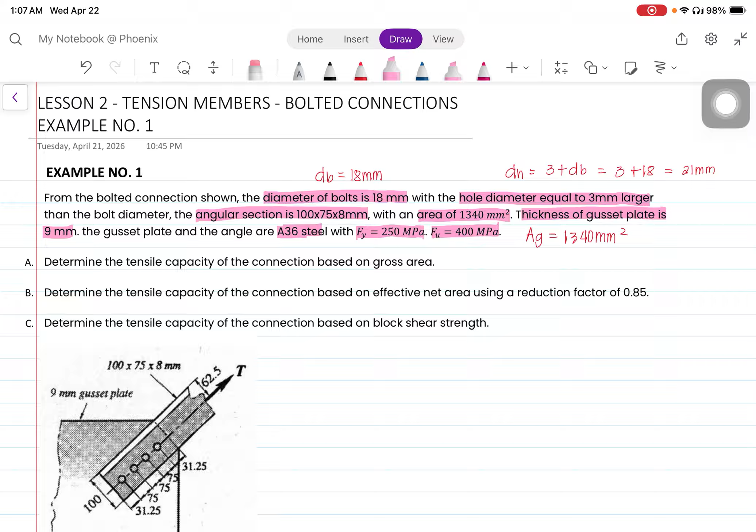So let us go one by one through what is being asked. For letter A, we are asked to determine the tensile capacity of the connection based on gross area. So we are now looking for the tensile capacity based on gross area.

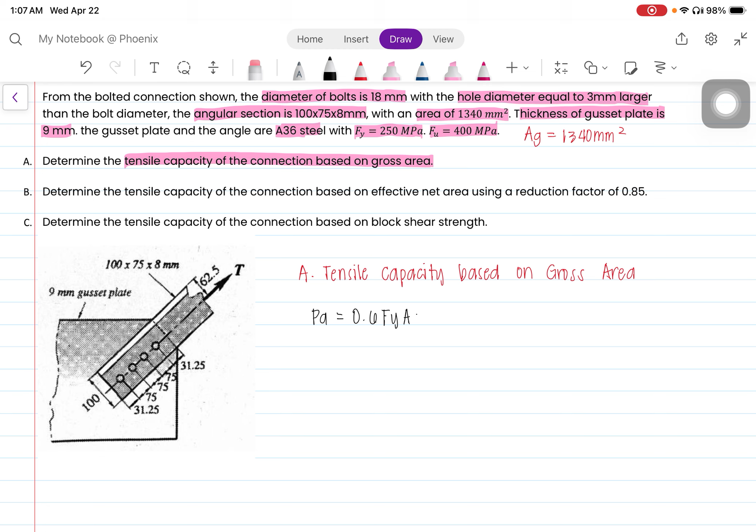So what is our formula here? The formula is PA equals 0.6 FY times AG. So do we have a value for Fy? Yes. What about the value of AG? Yes, that was also given to us.

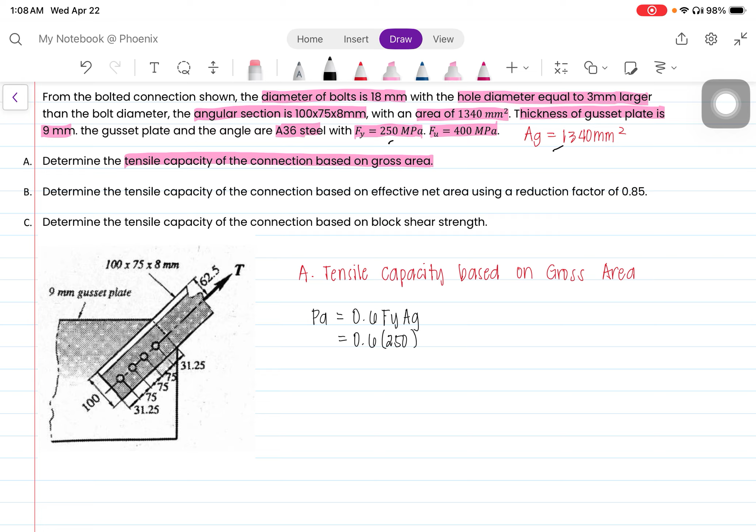So this means we can directly substitute. We have 0.6 multiplied by our Fy of 250 megapascals, multiplied by our AG of 1,340 mm squared. By calculating this, we get 201,000, and this is in Newton.

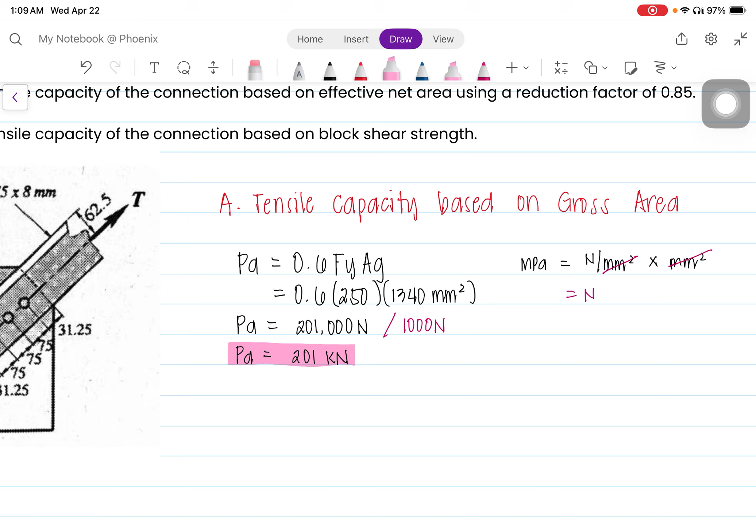But since this is too large, let's convert this into kilonewton by dividing by 1,000 Newton. Therefore, our allowable tensile strength will be equal to 201 kilonewton. And that is now our final answer for letter A.

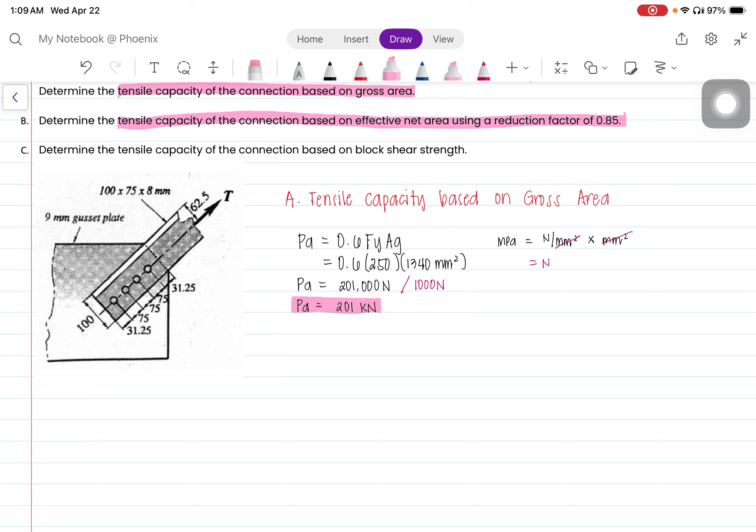Next, we are required to determine the tensile capacity of the connection based on the effective net area, using a reduction factor of 0.85.

For letter B, we are now required to get the tensile capacity based on effective net area. Take note, it says effective net area.

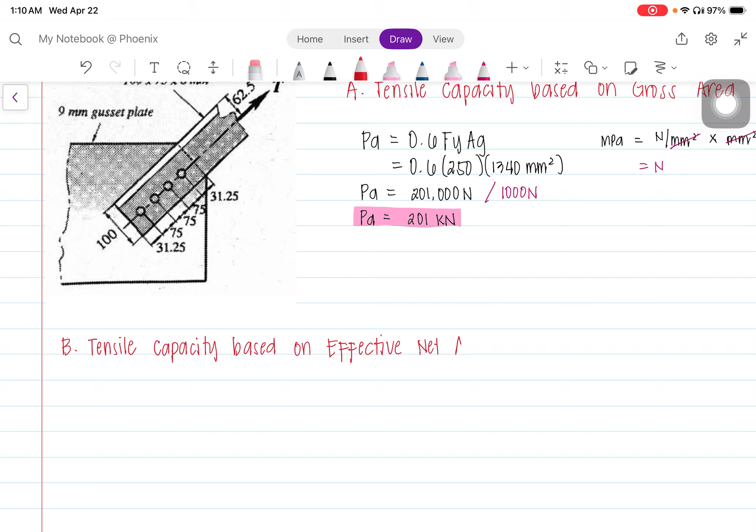So we need to get the effective net area, and we are also given our reduction factor or reduction coefficient, denoted by U, which is equal to 0.85.

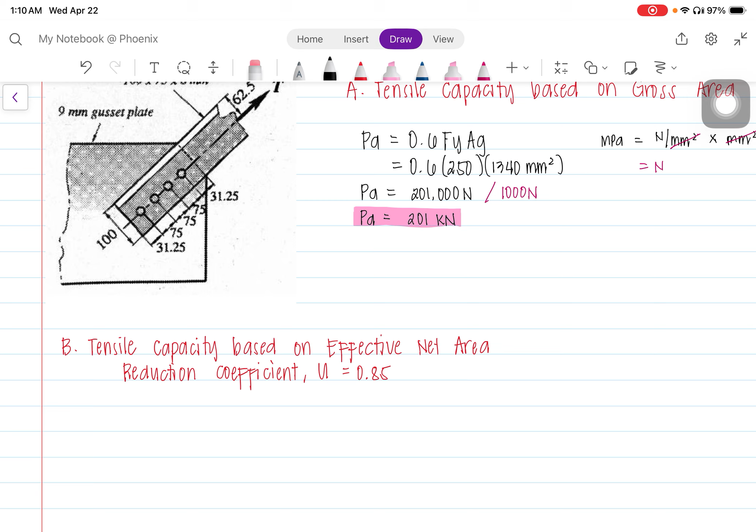So what is our formula for the tensile capacity based on effective net area? That is PA equals 0.5 FU AE. We use AE because we are talking about the effective net area, and AE equals the reduction coefficient multiplied by the net area.

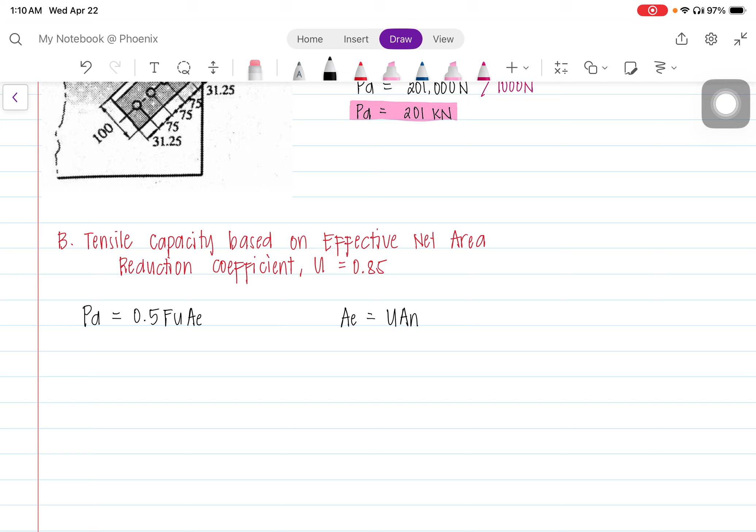So first, let us solve for AN. We need AN. So how do we solve for AN? As mentioned earlier, we just take the cross section, or take its outer edge.

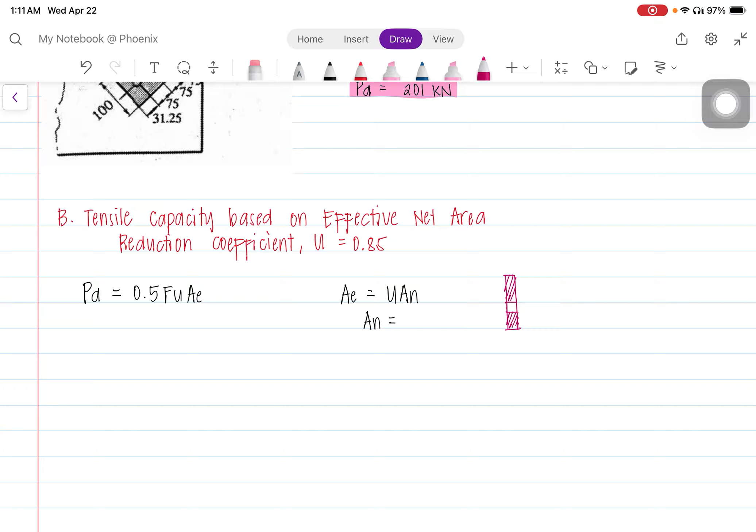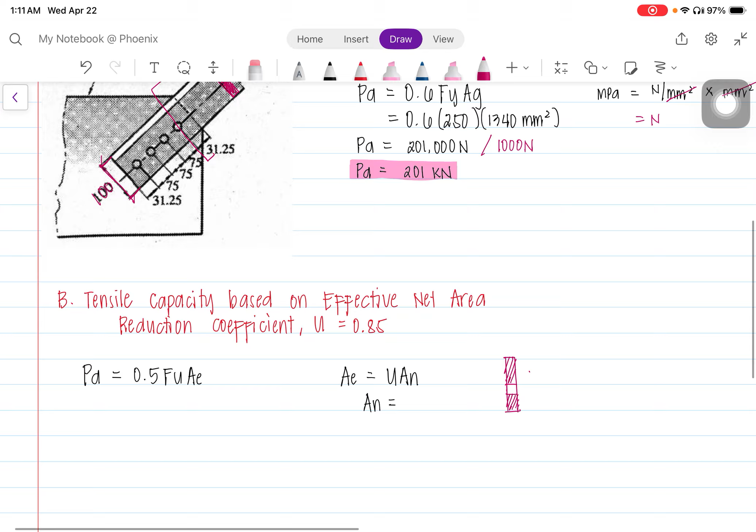As stated, the width here is 100. So that is your width. And what is the thickness? As I mentioned, this is the thickness of the angle, which is 8 mm.

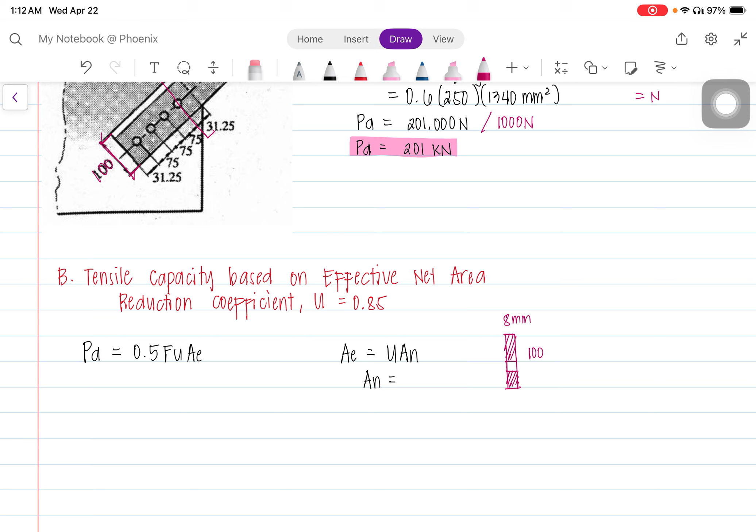So we can now solve for our AN. We say that it is the gross width minus the number of bolts times the diameter of the hole.

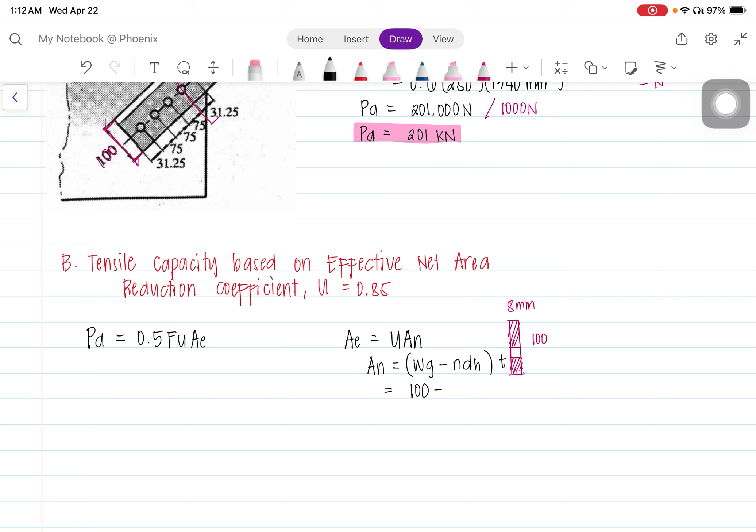And then we multiply it by the thickness. Okay, so let us solve for this one. We have now 100 minus the one that we will remove, since there's only one hole passing through here.

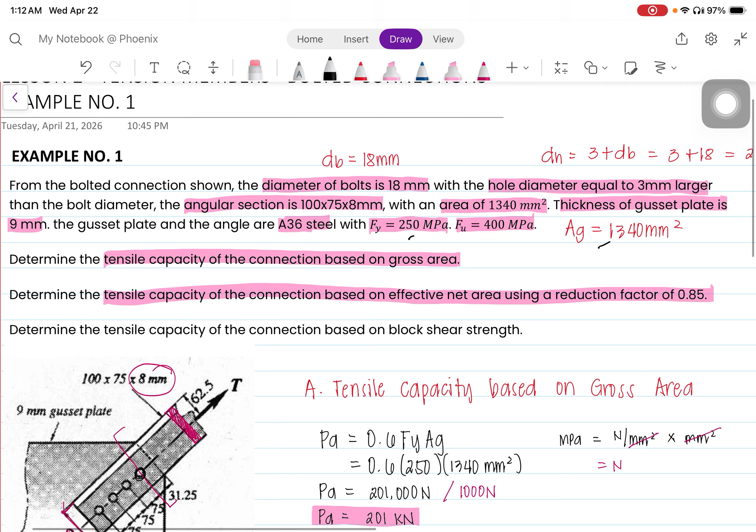So next, what is the diameter of the hole? We already wrote that the diameter of the hole is 21 millimeter. So we multiply it by 21 millimeter, and then we multiply it by the thickness of 8 mm. So we can now solve for the area net, which is 632

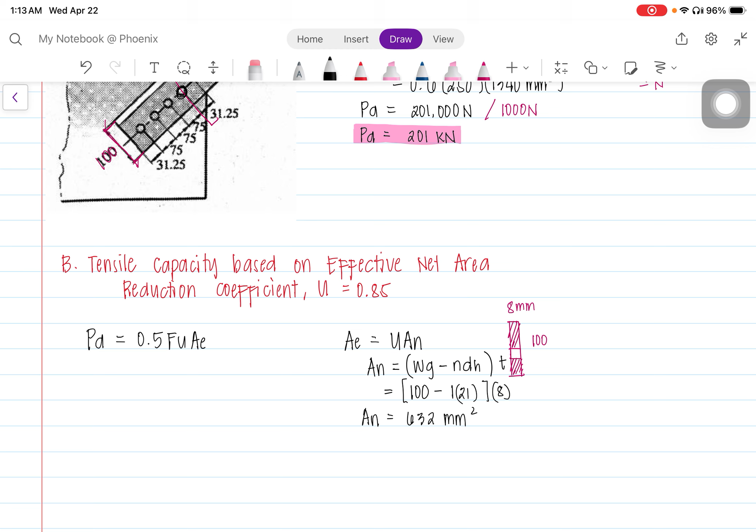mm squared. Okay, so to get now our AE, let's substitute here. So our PA now is equal to 0.5 FU, and AE we replace with AN.

Okay, let us just substitute the given values. We have 0.5 multiplied by the FU of 400 megapascals, multiplied by the U, our U is 0.85, and our AN that we got is 632.

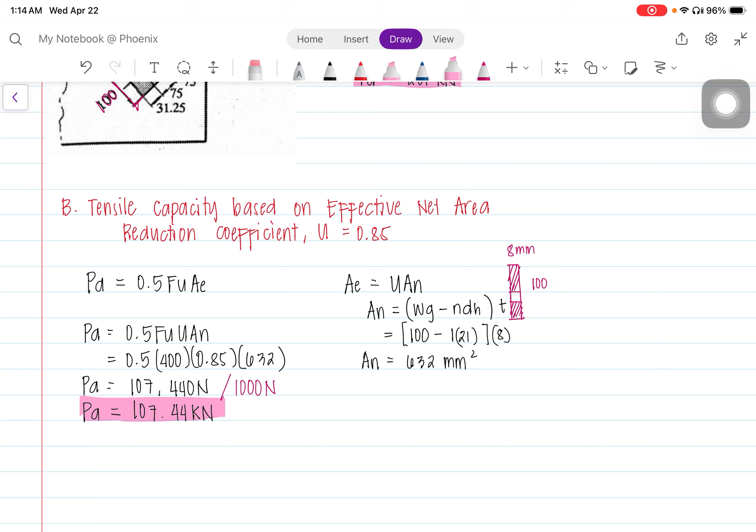Okay, and then what will be now our PA? Our PA will be 107,440 Newton. And since that's too big in Newton, let us convert this into kilonewton by dividing it by 1,000. What will we get for PA? That is 107.44 kilonewton. And that is now our final answer for letter B, the effective net area.

Okay, so next, let's get our tensile strength, tensile capacity, tensile capacity based on block shear.

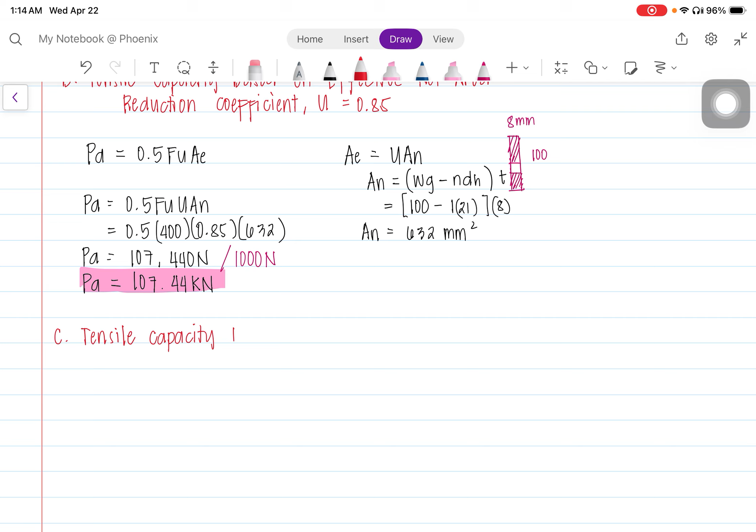Okay, so what is now our formula for block shear? This is PA is equal to 0.3 FU ANV plus 0.5 FU ANT.

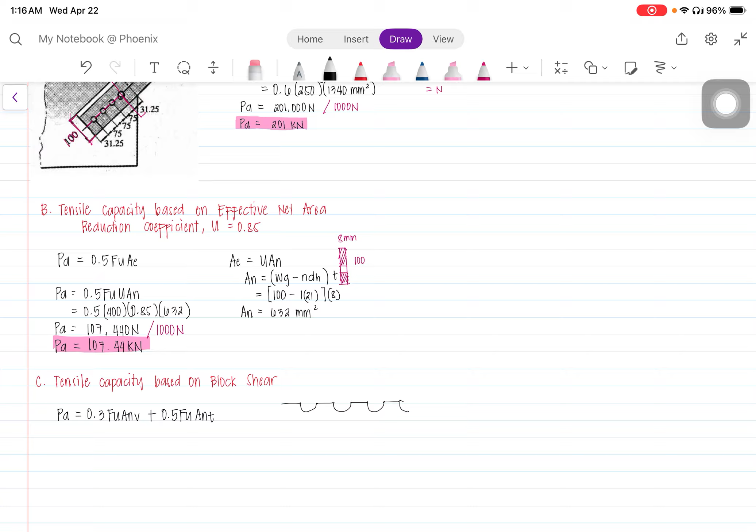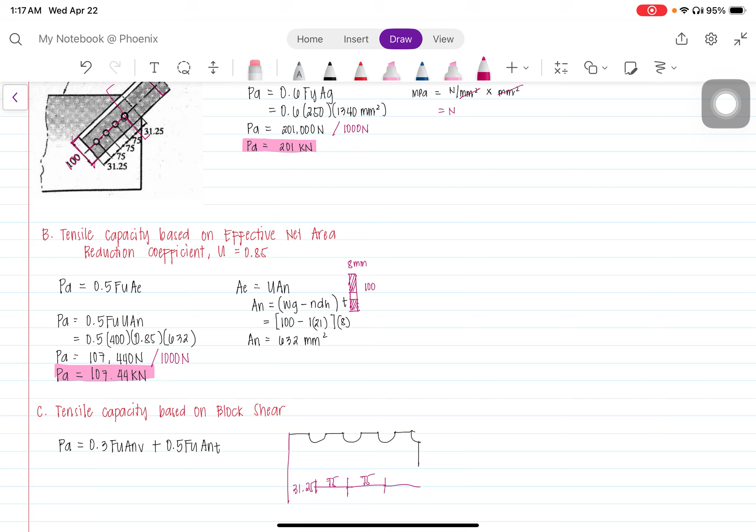And then, we were given the total, along with the dimensions. So the dimensions of this, from the edge, from the fiber of this, going to the center, that is 31.25. Then center to center, this one is 75. Then another center to center, this is also 75. And then from center to center is as well 75.

So if we get the total of this, what is the total? That is, very good, that is 256.25.

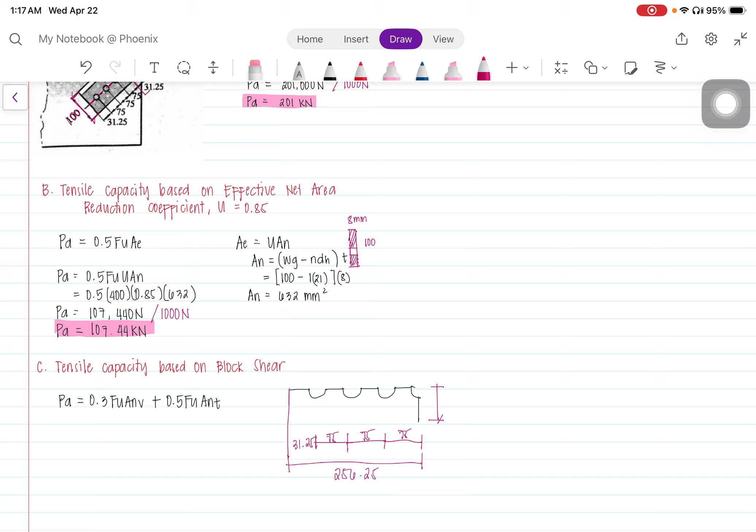Okay, and then what about this one? So that we can continue solving. Okay, we said the total of this is 37.5.

Okay, so let us solve now for ANV first. Solve for ANV. We said ANV is the shearing, so that means we need to get this. Okay, so to get that, we just get the total width.

256.25, and then we subtract the holes. So how many holes? One hole, second hole, third hole, and half. So we have 3.5. And what is the diameter of our hole? That is 21, very good.

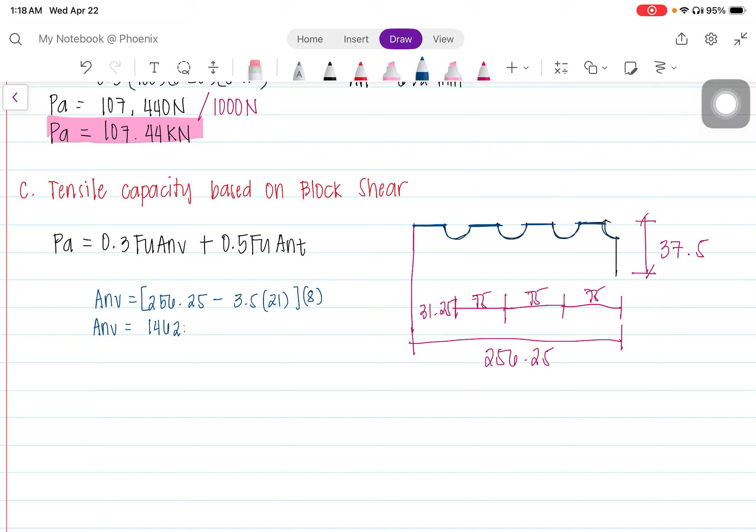And then, we multiply everything by the thickness of the angle, which is 8. And we can now have the ANV equal to 1,462 mm squared. So that's what we'll use.

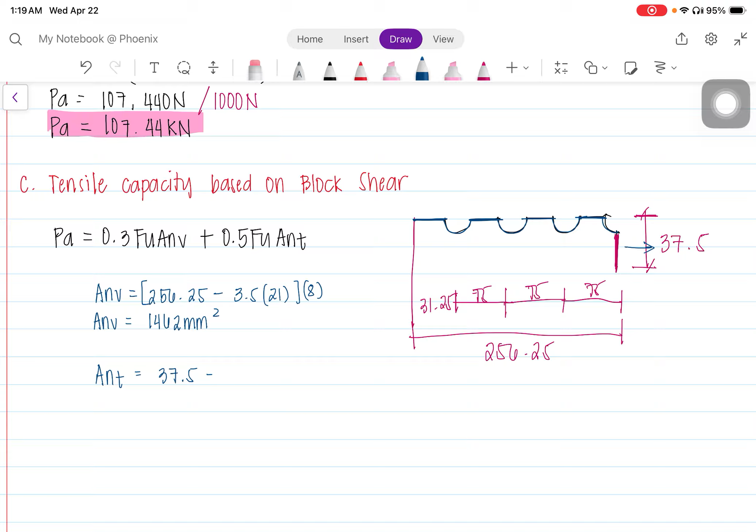But we know that from the center of our hole, going to the bottom, that is 37.5. And then we subtract, how many holes does it pass through? Only half, right, just this part, just that part. So we have 0.5. And again, what is the diameter of the hole?

That is 21. And then, we multiply everything by the thickness of 8. And what can we get for the ANT? That is equal to 216 mm squared. Very good.

Okay, so we can now move to the formula. Let's go back to our formula. PA is equal now to 0.3. What is our FU? Given to us is 400 megapascals, multiplied by the ANV of 1,462, plus 0.5, again our FU is 400.

Multiply it by the ANT of 216. Then we can now have our PA equal to 218,640 Newton. And to convert this into kilonewton, we just divide it by 1,000 Newton, and we can now get a tensile strength of 218.64 kilonewton.

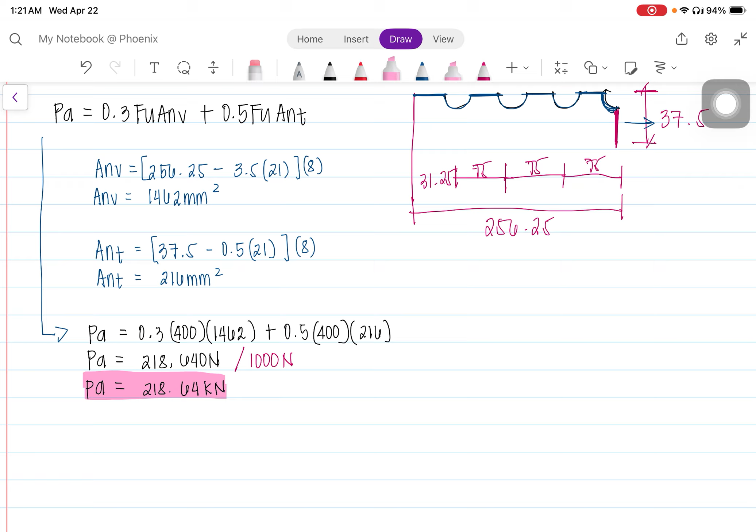And that is now our final answer. Okay, so we've now satisfied all the requirements asked of us here. So this is for our example number 1. So see you on our part